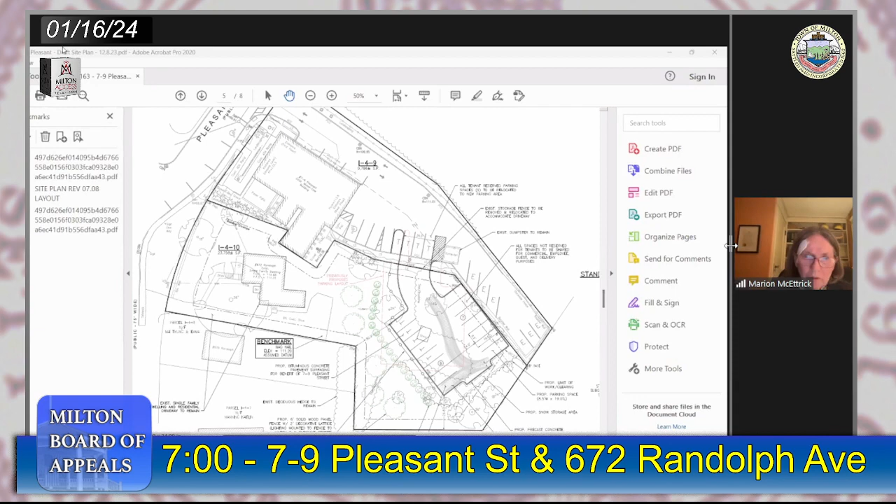So this is kind of the key plan. This is the new parking plan, most updated. And it shows you can see the green arborvitae surrounding the left side of the parking area, the 15 parking spaces within the lot, and then there are 3 trees. That's the entrance, and then the 3 trees in the back here are the red maples.

And on this plan, which we haven't revised yet to this extent, those maples are going to be moved a little bit further, a little closer to the parking area. As close as will still provide for good growth for both types of trees. Let's see.

I guess you should just note, and this is not different from the plan that I showed you several months ago, that quite a number of parking spaces have to be removed to create the entrance to this parking area. So those are all tenant spaces. The 5 tenant spaces are all being moved into the new parking lot. And then over on the right, in the rear of the existing parking area, you now see 3 parking spaces marked with E's instead of the tandem parking that we had there before.

Let's see. It's a little hard to see, but there's a note showing the snow storage area. And that's the part of this parking area that doesn't have a fence. So, and it's not going to have a big curb either, because we want to make it easy to push snow back into that area. Let's see.

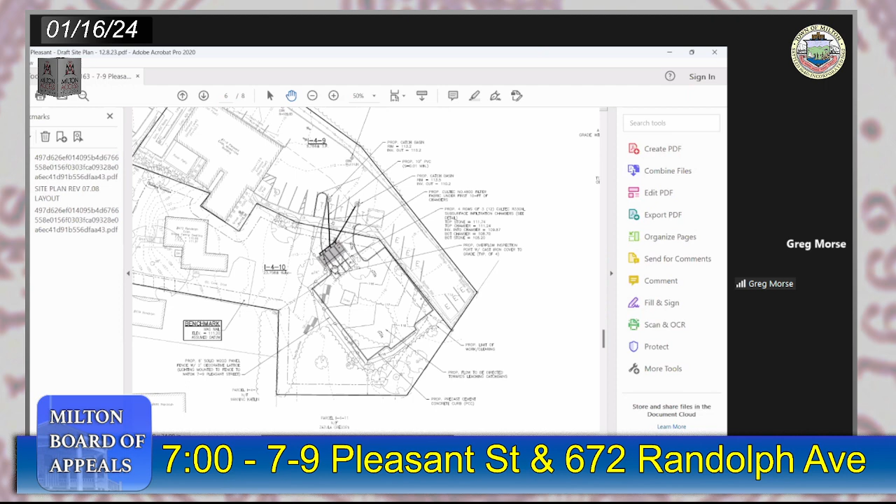Okay, I just have to take a quick look myself to see if there's other pages I wanted you to comment on. No, there's a detail page talking about the stormwater structures. I don't know if anyone has an interest in that. Existing conditions page. I don't have any requests for further comments. Greg, anything else you can think of?

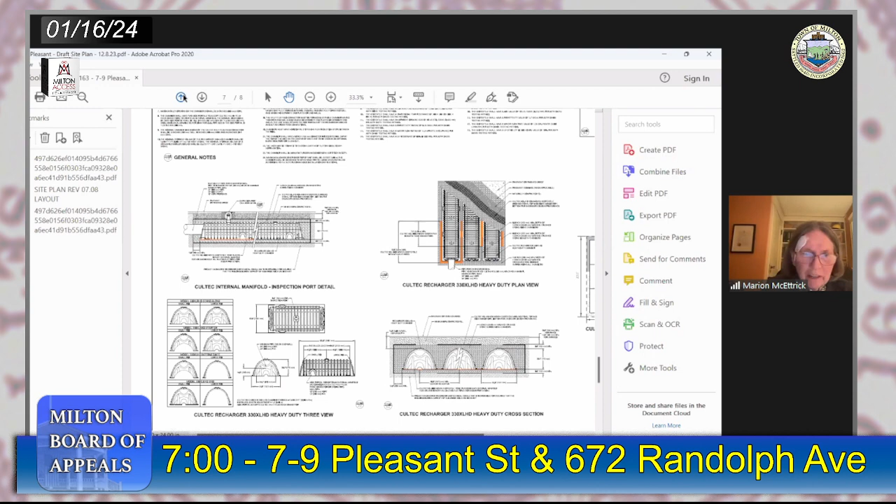The only piece that I wanted to point out on the site layout plan that we didn't talk about in super detail was the location of this proposed fence. The parking lot behind the Bent's building right now is surrounded by a wooden fence. And Marion did state we are putting new fencing. This is the location of that new fencing. So the new fencing would go between the parking lot and the abutting residential properties. It's a 6-foot high solid wood fence, and on top of the 6-foot portion there is a 2-foot decorative lattice. It essentially matches the fence that's already existing at the Bent's factory.

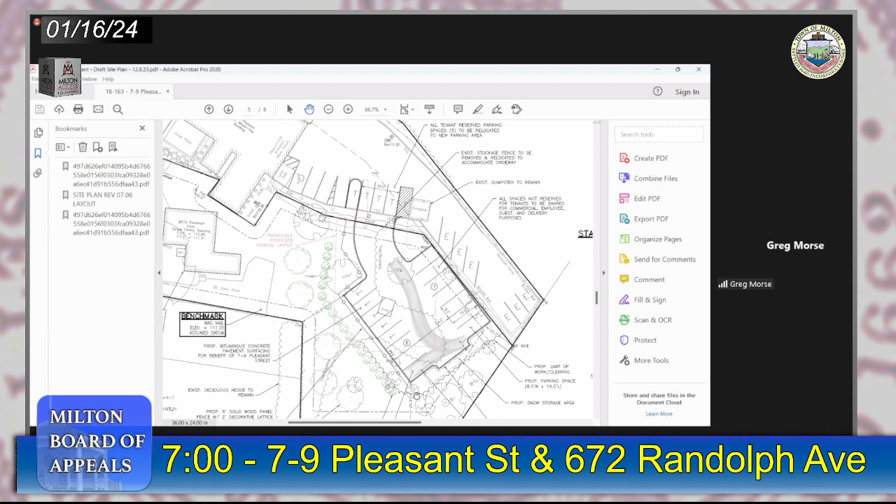The planning board had requested at their meeting last week that we extend the end of it here by approximately another 5 feet. So that's one of the revisions we're making at their request. Other than that, I think Marion touched on everything that I had on my list, so I can leave this up on the screen if the board wants, or I can take it down, whichever you prefer. Yeah, why don't you leave it there for 1 second and let me just ask Ms. O'Donnell, do you have any questions of Mr. Morse? No, I do not. Mr. Daiber?

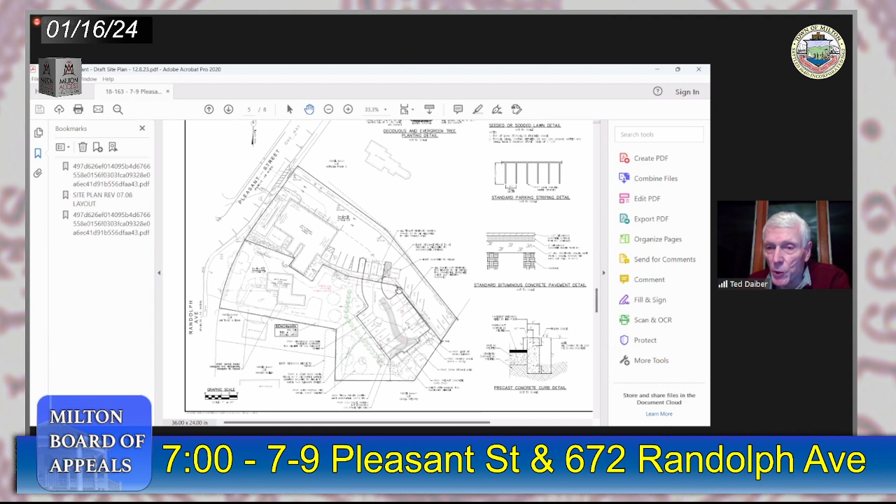Excuse me. Ms. McEttrick, you said that the town of Milton Engineering Department is going to be issuing a report on the stormwater. Usually what they do? Commissioner, this isn't a plan that requires the full stormwater review process. Sometimes there's a peer review with that. But we always send it to the engineering department, and what we expect to get back is either the following things need to be adjusted or we have questions, or sometimes the first letter says we reviewed the plan, it's satisfactory, it shows the appropriate control of stormwater runoff onto neighboring properties. We haven't received that yet.

I believe the town engineer has moved from Milton, and so a staff engineer now is reviewing the plan, but there's been a delay in looking at it. Not that there's anything problematic, just that they hadn't gotten to it yet. So we will be expecting to get a letter back as soon as possible. About a week and a half ago, the planning director sent it again, and a new engineer was assigned to review it. Mhm.

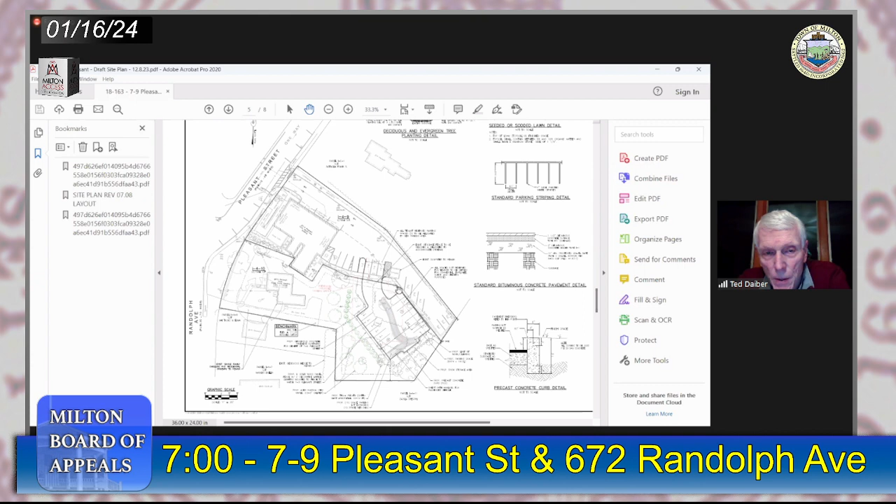Do you have any sense of, I see the outline from the prior plan of where the parking lot was gonna be. Is this proposed lot then smaller in area than the prior one? It is. This is 4,900 square feet. I don't have the number. I know the other lot was larger because there were more spaces. Mhm. Do you contemplate there would be a plan that would show the area and dimensions like this as a separate lot on that property, for purposes of identifying it and what the commercial area would be? Okay.

This is, I mean, what if we call it a separate lot? Well, we're not proposing it as a separate commercial area. Excuse me, I'm sorry, go ahead. No, go ahead. No, yeah, that it would be like a separate lot. I don't mean necessarily a separate lot, but because that's the only portion of that property that's commercial. So something that would designate. Right.

We're not subdividing the lot, but what you're saying is you want to be very clear about what area this lot is being used for. This is a commercial use, parking for commercial use. Right, with dimensions. It's not a separate lot, but I think after just discussing this a bit with the Board of Appeals, we probably can understand what you're looking for, but I think what you're looking for is a perimeter line.

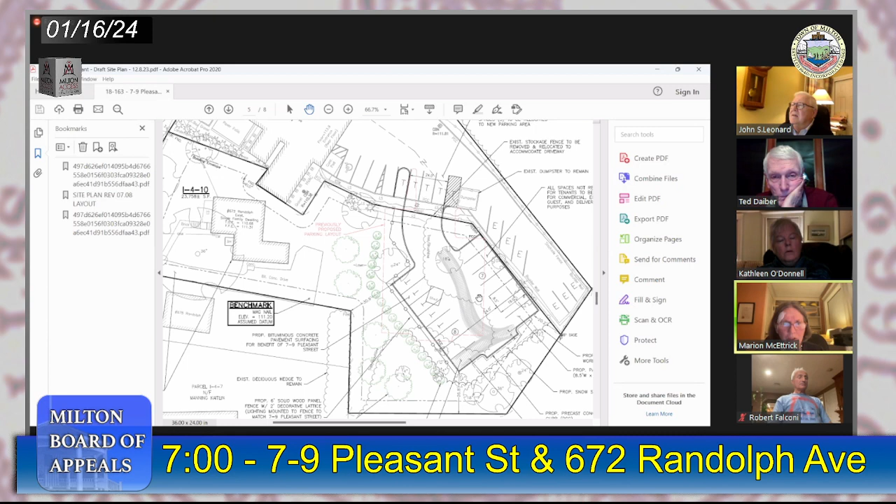The application actually is for what you'd call mixed use for this lot, because it's going to continue to be a residential lot with a residential use. That's the residential structure in front, which has its own driveway. And then there's going to be commercial use of a portion of the lot for this parking area. So usually, the site plan is the identification of the area where change is proposed. But I have no problem with the idea of creating a line on the plan that surrounds that area. But it would just be another line. I think it would be just outside the fence line.

I don't see any reason why the landscaping would be commercial per se. It's certainly being installed to provide further protection. It's entirely up to you how you would want me to treat that as a perimeter on the plan. The reason we don't create a line like that normally on an application like this is that we're not doing a subdivision, and we don't want to create the appearance of a subdivision where there are now two lots. That would be a whole different process. Yeah. And I haven't seen one like this, to be honest. It's so unusual. I agree, and I think your question...

So, Ms. O'Donnell and Mr. Leonard, if I'm wrong or if you disagree with me, I think there has to be some specificity to what is being designated for parking use for commercial purposes, relating to the other parcel, I would think. Well, yeah, I think it's a variance only with respect to a certain portion of the property, and I think that has to be identifiable by dimensions and area and whatever. Well, I think we could draft the decision to say that the commercial use applies to the parking area. I think it would be helpful.

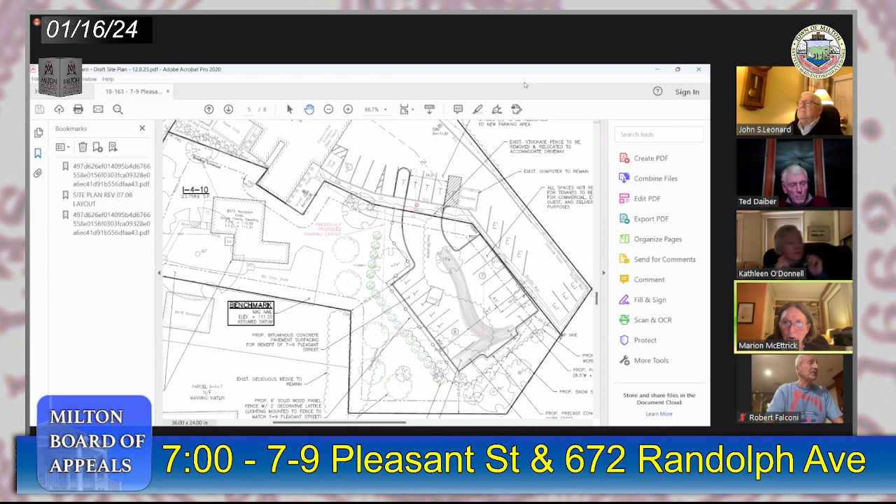So if you could set a final meeting date after February 8th, but not too long after, so that you can finish this process for the purposes of your board, I think that would be very helpful. I realize that you can't really make a decision without knowing that the site plan has been approved. The site plan, if approved, is going to be approved with a condition that the Board of Appeals has to approve the required relief. So the two things are really happening together.

But that's the schedule I suggest. We get our revised documents to you within a week. I'll update you on the status of stormwater review with the town. And we have our next meeting with the planning board on February 8th. So we would ask that you schedule a meeting as soon as you can after that date.

Okay, would you like to give yourself a couple of weeks breathing room? Sure. Whatever. It's really more for your convenience. We're not in a huge rush, but I didn't want to drag this process out. I'm sorry that it had to be delayed and we didn't get the December hearing with the planning board, because I know you have a lot of other work. So if we selected something at the end of February, the last week in February, would that make sense?

Ted, do you have general availability at the end of February or early March? Yeah, I'm better in February. In March I'm on a committee that's gonna be meeting a lot, so February would be better for me. Is school vacation week an issue for anybody? Because otherwise it could be February 22nd, or maybe the 21st. I'd prefer to avoid that week, if you don't mind. Avoid it? Okay. Then it could be the last week in February. That would be Tuesday the 27th, Wednesday the 28th, or Thursday the 29th.